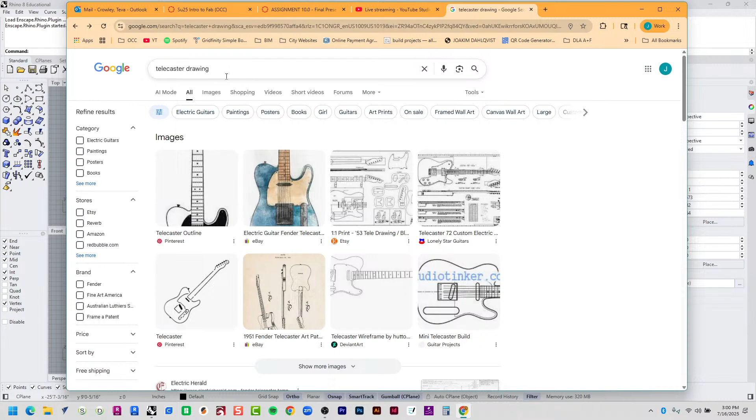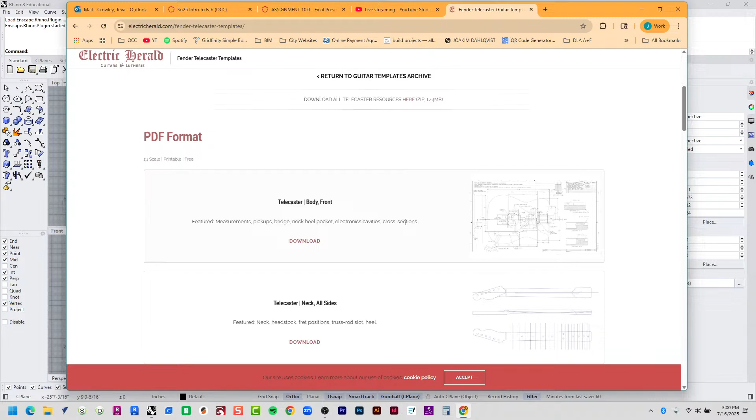If you just Google Telecaster drawing, Telecaster body, Telecaster blueprint, the website we're looking for is the Electric Herald. If you go to their website, you can find all of these Fender Telecaster templates as PDF formats, which is super helpful because we're going to steal all this information.

The fact that it's a PDF format means that likely this was drawn in some sort of CAD software and then PDF'd, which means I can open up that PDF in Rhino and steal all the vector information that I need without having to go through and use several different commands to redraw it. I could just take someone else's work.

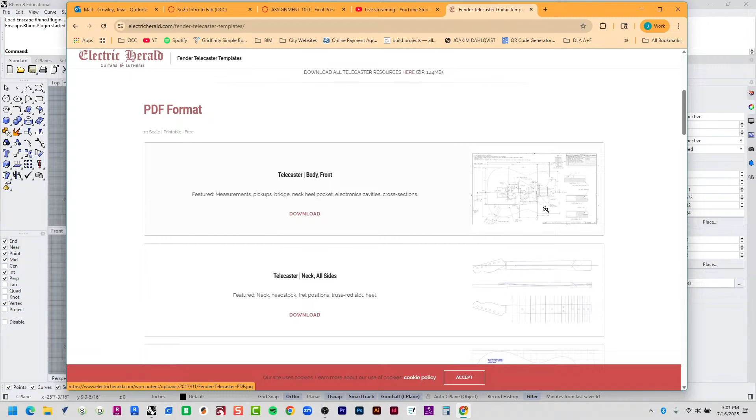So I'm going to be heavily borrowing this PDF here. Telecaster body front, I'm going to click on download. And here it is—all the specs, all the dimensions.

One thing to note about this project is that where all your pickups go and all your hardware, there's different depths. Each one of these has its own specific depth. And then also some of them have to be connected via some sort of channel, which you have to do in post.

So what I can do with the X-Carve CNC is I can get this whole entire outline shape plus all of these locations where all of these pockets go. We can cut it out of quarter-inch plywood, something really thin.

What you can do with that piece is take it over to your stock material, your final material for your Telecaster body, which has to be about 2 inches—1.75 inches is the thickness of your actual electric guitar body.

And I can't mill that on our little X-Carve here, because to be able to mill this out with one stock material that's 1.75 inches, I would need a bit that's at minimum 1.75 inches long. Also, most of it needs to be hosted by the router itself.

Then the router has its own issues with the Z depth, right? It can't go that high, so I would need about 4 inches of clearance in that CNC, and I don't really have that. So our workaround is going to be cutting quarter-inch plywood, very easy, very doable.

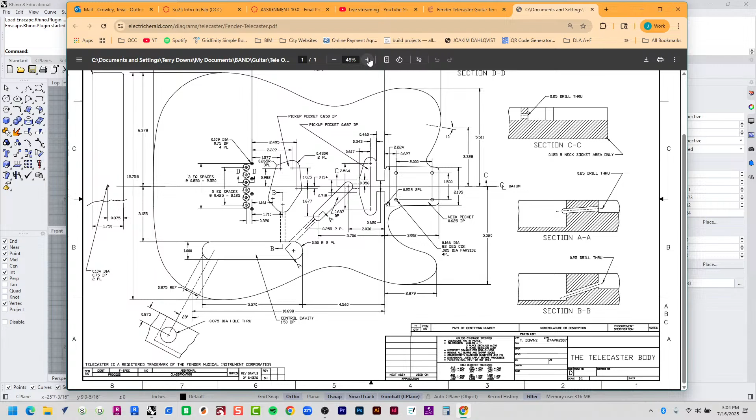And then these little tunnels in here from this pocket to these two pockets, these little dashed lines represent the hollowness inside of the guitar body itself. Let's keep the diameter for that.

Oh yeah, everything is in here. We have all the different radii—0.265 radius there, 0.430 radius there. This is section marker B, so it's like an architectural section, so I can look at section B. Lots of information on this drawing. Here's section BB, and there is a quarter-inch drill through.

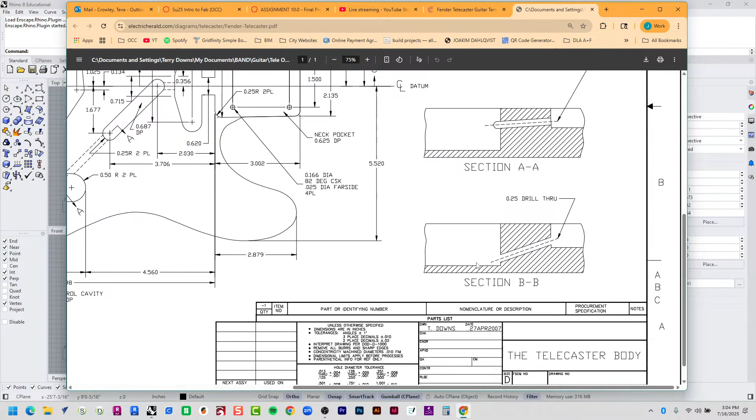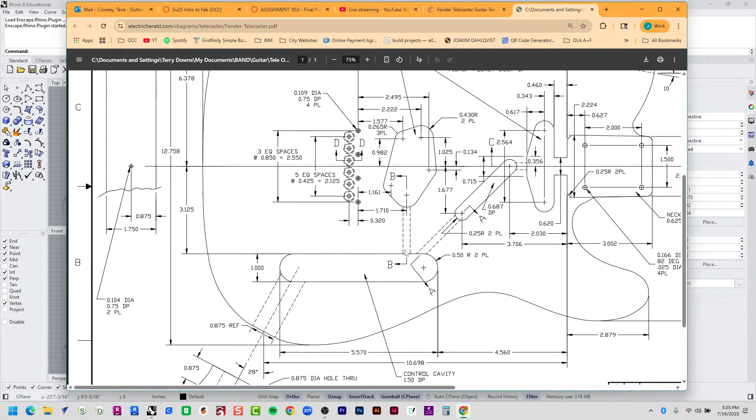You can see that it's angled, and that's because where BB occurs, I'm going to have to take a really long drill bit and tunnel my way through there. It's hard to get a big fat Makita drill in there to go straight in, so you're actually going at it at an angle, which is totally fine. It's just for passing a cable or something through there. I'm not a guitarist, so I don't really know what goes in here, but I know how to make this thing, so I'm going to be borrowing from this.

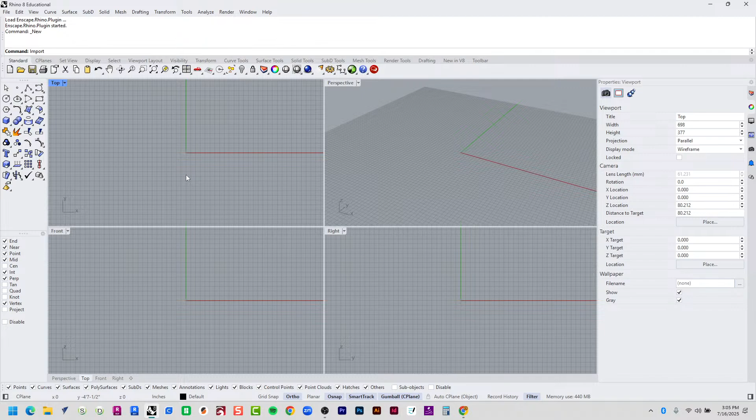This is sitting in my downloads. I'm going to start a new project in Rhino, go to small objects, inches, and import. You can go to File, Import, or just type Import. I'm going to my downloads - I don't see it here, let me make sure I've downloaded it. Let's put it in downloads for now. Back in Rhino, here it is.

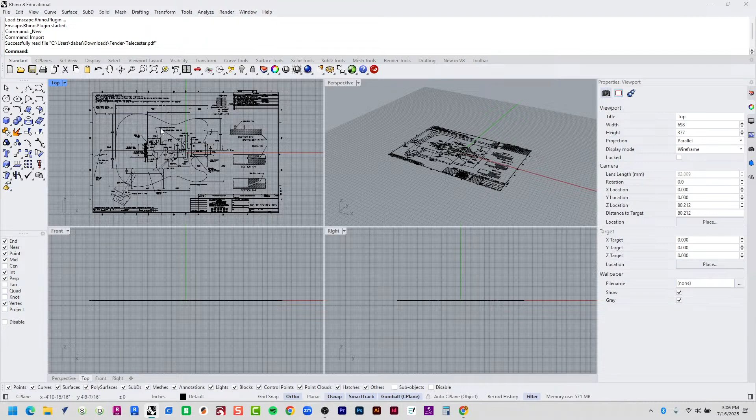I can scale it up or down, I'm just going to hit OK. Not really concerned with the scale because I'm going to have to scale it up and down myself anyway. So here it is, and if I go through and start clicking these things, I've got actual line work in here - these are actually little teeny tiny lines, which is great. I just need to trim this up, clean it up, so I can have one nice big long continuous line instead of a million lines.

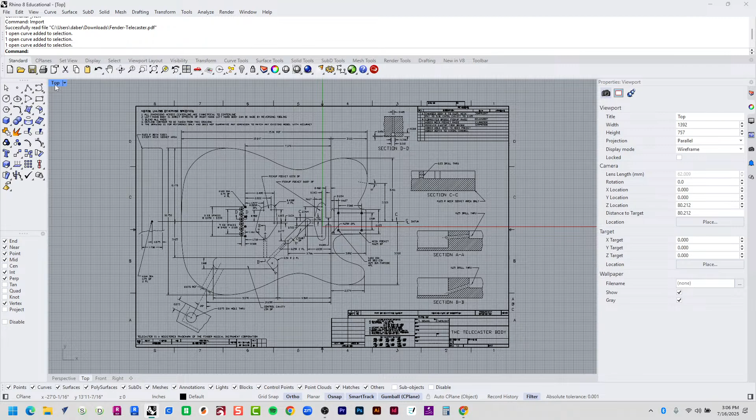So I've got a couple tricks for that. First, we want to take care of the scale, so select all of these curves by making one big large selection window. I'm going to organize this into some sort of layer. Let's put it on layer 1, change object layer. I'm going to rename this layer to PDF, whatever. I love using layers because it keeps everything super organized, but I can turn things on and off as needed, and lock things that are on a different layer.

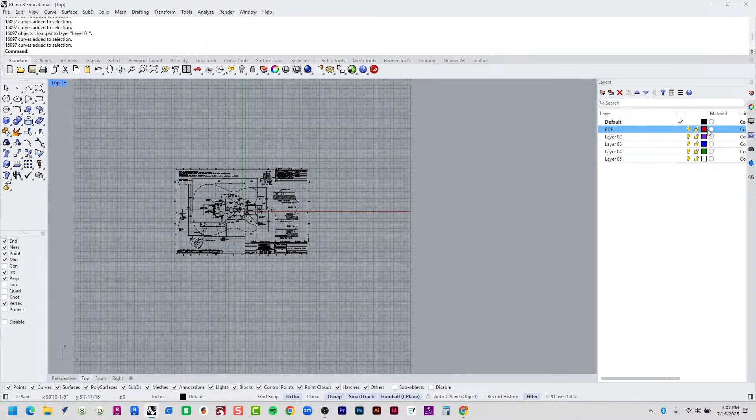I'm noticing that this did not turn dark red - that's the layer color it is on, it should all be dark red. So if I select it all, go to Properties, this little rainbow button right here, Display Color - this should be set to by layer. Usually it's not when you import things, so here it is, now it's all dark red.

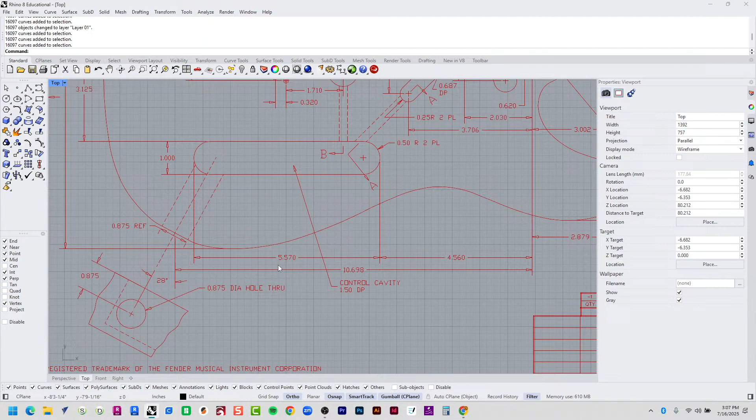I'm going to select it all and look for a measurement that's going to be easy to replicate, some round number. How about 1 inch? That sounds like a nice round number. So I'm going to select everything and zoom in on this portion that says 1 - from the tip of one arrow to the tip of the other arrow, or from one horizontal line to another, that should equal 1 inch.

Scale. All right, so I'm going to scale it from this base point. I'm going to click here once I've identified this endpoint. Now it's asking for a scale factor or first reference point. I'm going to come down here and snap to this perpendicular end and intersection point, click that, and then for my second reference point I'm just going to type in 1.

So you did both the top and the bottom, hit enter, and then typed in 1 when it asked for the second reference point? Yes, so basically what we're saying is from here to here, make it 1 inch. That's it. So let me undo and redo that.

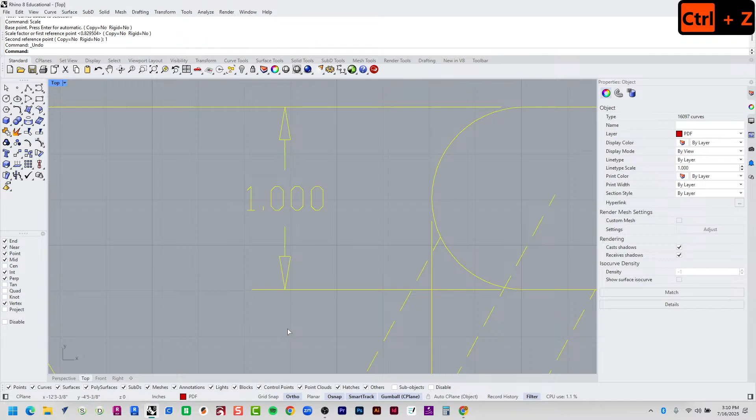Without even reading out the commands, I'm just going to say from here to here, 1, enter. Say from here to here, make that 1. Whatever it is, I don't care what it is. It might be 1, I can actually figure that out if I undo it again. Distance. Currently, based on the way I brought it in, this is 1 3/16 of an inch. It's actually kind of close, but not close enough, right? I need it to be exactly 1 inch. So from here to here, 1 3/16 of an inch.

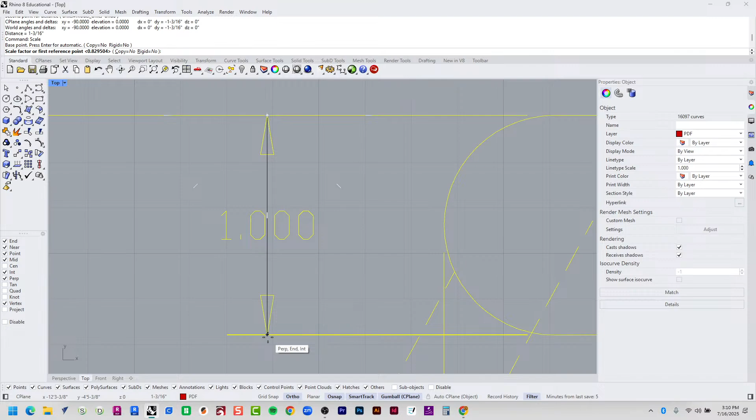So we're going to say scale, base point, here, click. Scale factor or first reference point. So scale factor, I could say, hey, scale it down 50%, 0.5. Scale it 2, which doubles it in size. Or I can say, here's a first reference point, make it go to this second reference point. So first reference point is going to be this point. I'm going to click it. Second reference point, I'm going to just type in 1, which is 1 unit, which is 1 inch, and then hit enter. So now this whole entire drawing should be scaled properly.

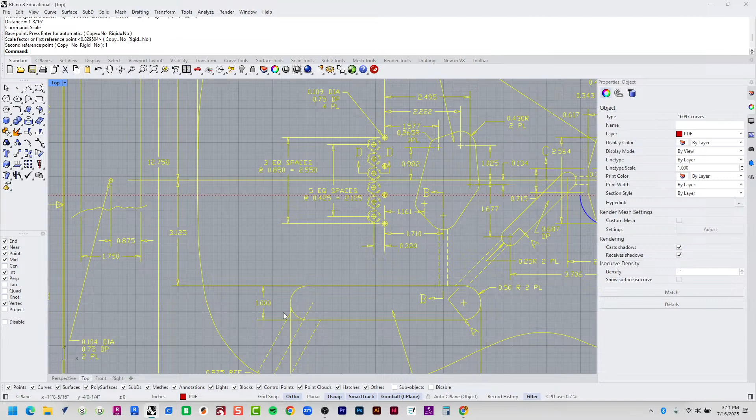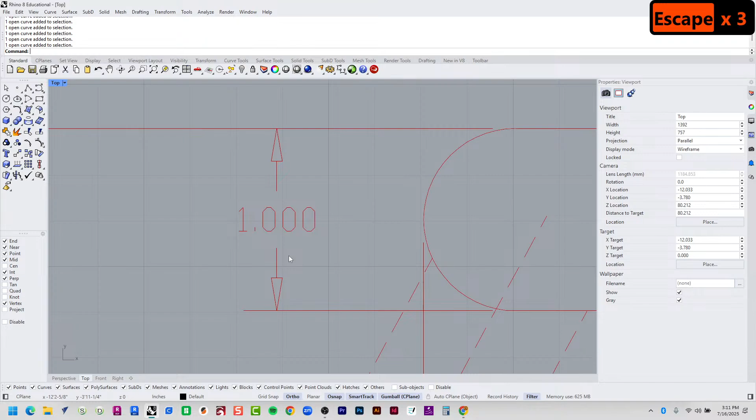All of these numbers here, don't be fooled. These are lines right now. They used to be dimensions in whatever software they drafted this up in, but now because it was a PDF and then I imported it into Rhino, these are not numbers. This is not text. These are not arrows. These are all curves. These are just lines. So just because it says 1.000 doesn't mean it is 1.000. Although now it should be. So if I test that theory out, let's pick another round number.

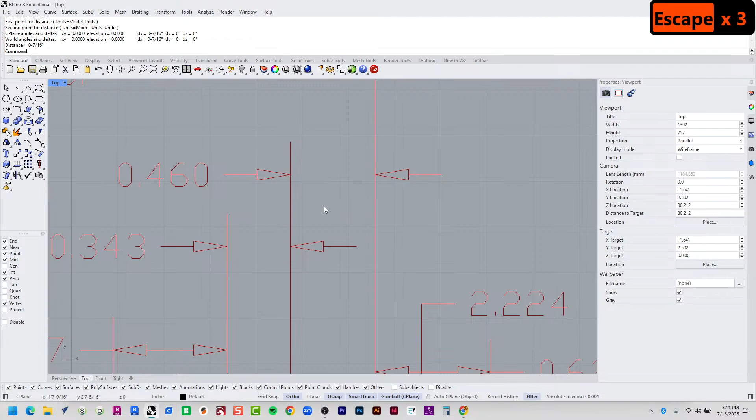The measurement between these two arrows should be 0.460. Let's type in distance and measure from this line to that. I'm getting 7/16. What does that equate to? Let's try distance. This time, instead of using model units as my measuring method, I'm going to click here where it says units, and I'm going to say measure things for me in the form of inches in decimals.

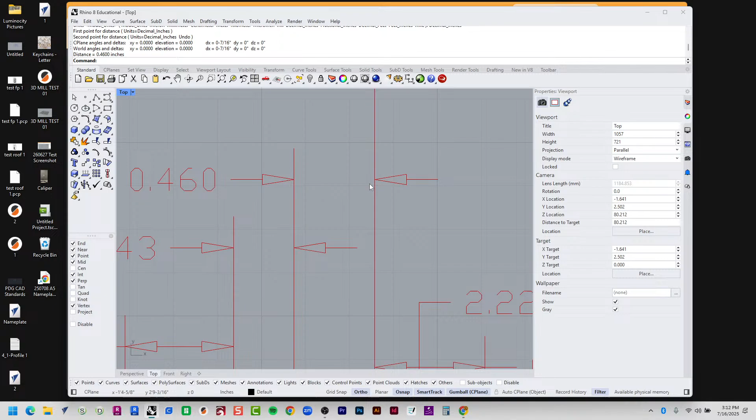Right? Although my primary unit is in inches, although I'm usually working with fractions, I can still measure using whatever I want. I can even measure in millimeters. What does this equate to in millimeters? So it'd be like grabbing a metric measuring tape and measuring things that are American. It's the same thing. So the distance in inches and decimal from here to here is 0.4600. So that means everything's scaled properly.

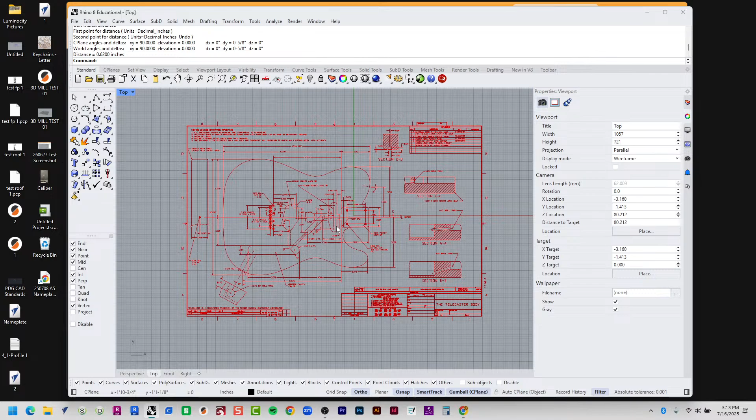Let's check it again, here to here, 0.3433. So just with those 3 measurements, I know I've done something correct. 0.620, here it is, 0.620. So what that means is this whole entire drawing is perfectly scaled, right? When I'm in Rhino, I'm typically modeling in a 1-to-1 form, right? 1 inch in my head is equal to 1 inch in real life is equal to 1 inch in Rhino. So 1-to-1. So now this is 1-to-1 scale.

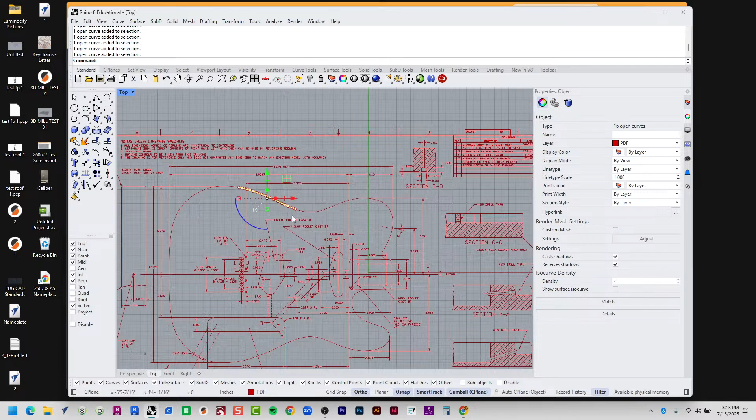What I need to do is I need this information right here, all of these curves right here. And I can go through and hold shift and I can select each one and then keep panning around and zooming in and out until I've selected everything, and then join them. But we could also go a little bit faster using selection windows. And this is where making cross selections like this come in handy. There are two different ways to make these selection windows, left to right or right to left. Those are two completely different things.

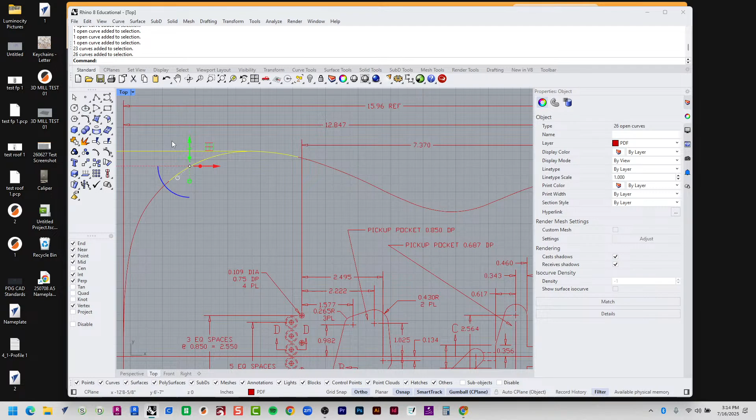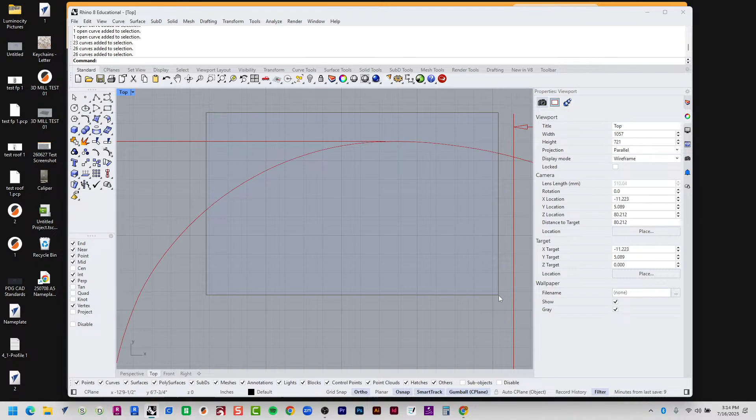So let's look at what it means if I do it here from left to right. It selects all of these lines. Now if I do that same shape right to left, it selects all of those lines plus some other line, right? So when I go right to left, it's actually able to select all the lines that are fully encompassed by this window plus whatever is touching it on the edges, which includes this horizontal line. If I do the same shape going left to right, it will only select things fully encompassed by that window, but not touching the edge, which I can use to my advantage, right? So I just swooped in 22 curves in that one selection.

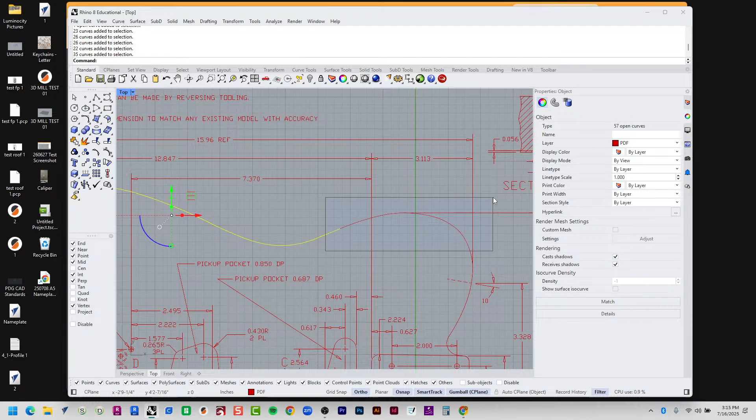I'm going to hold shift and make another window, left to right, trying to make sure that I don't fully encompass the wrong things. All right, there's a bunch more. Let's do it again, left to right. Make sure I'm not fully encompassing anything else that I don't want. That looks good. It can get tricky. Sometimes I'll go right to left if it's easier ergonomically for me.

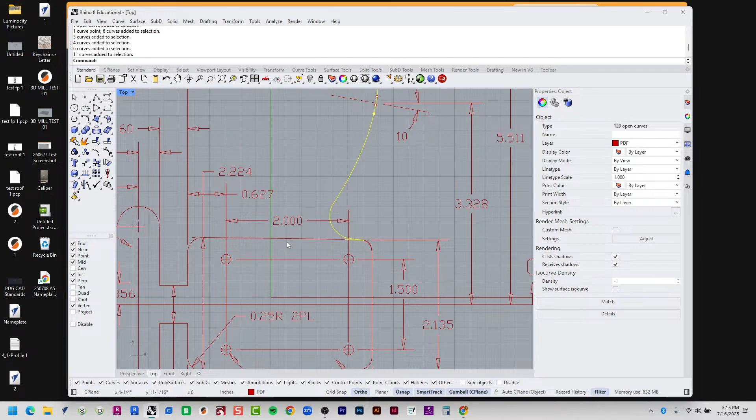And now I can go much faster, but I need to be very careful, right? This is actually the line of where one of my pickup pockets goes, so I don't want that line. How do I remove a curve from my selection? Hold Control and then select that curve. That's deselecting specific things. Letting go of that and holding Shift is adding things.

I can also deselect using a cross selection window. Same concept, left to right, right to left. So let's grab all that again. Let's grab this stuff again. Being very nitpicky about what I pick up. I think I'm trying to go this way.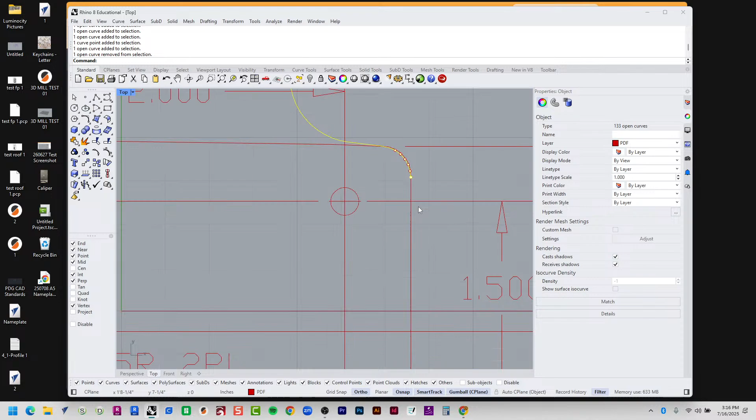So I can select the one that I want using the selection menu. It's saying, hey, do you want this one or that one? I'd have to kind of zoom out to figure out which one I do want or not. Sometimes they're the same exact shape, so it almost doesn't matter. So if I hold Shift and click here, and I can cycle through it by just hovering my cursor over it, I see pretty much no difference, so I'm just going to choose whichever one.

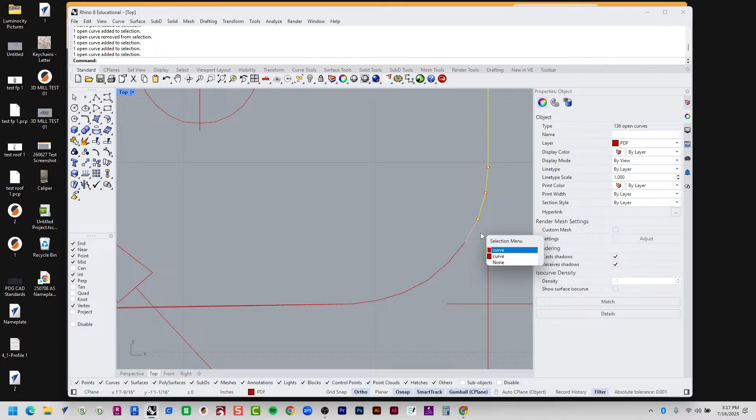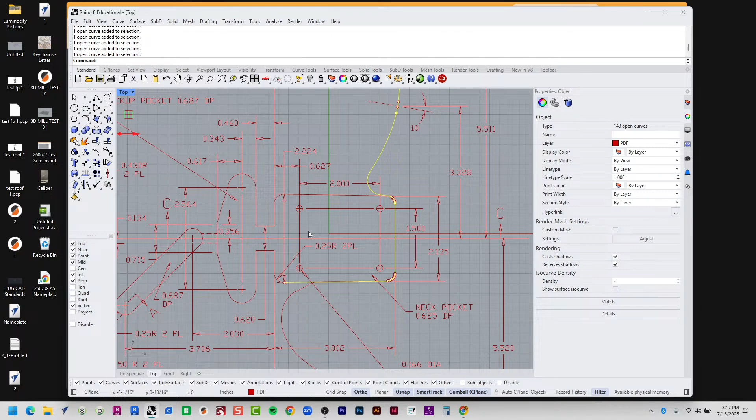Okay, again, there's some shared geometry here, and that's because it's the pickup pocket plus it's the overall guitar shape. So what I've done in the past is actually make two templates on the CNC, so that way I can first do the outline of the guitar and then do the pockets separately, because this neck pocket is all the way justified to the edge of the guitar body, so I can't just cut this shape out the other way.

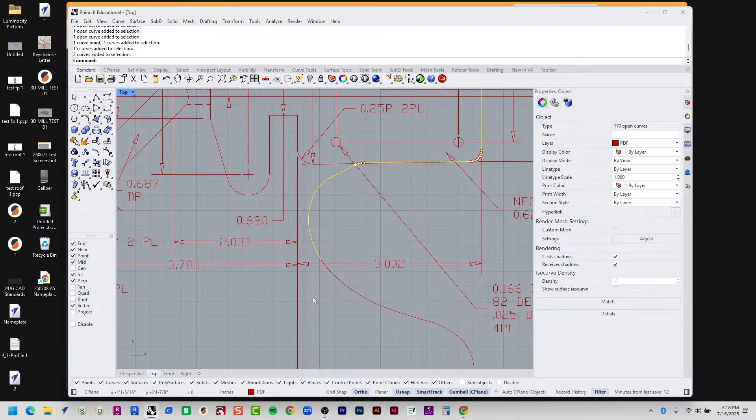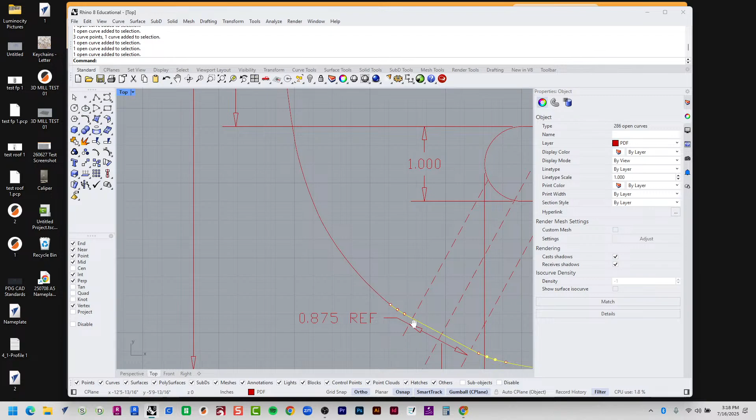So this line is not correct. I'm going to deselect that and select that one instead. Zoom in and out as needed, pan as needed. Make big selection windows when possible. And just like that, I'm done.

Where? Oh, wow, great eyes. Good memory. All right.

You want to be super careful. You just spent 30 seconds selecting all these. Don't click anywhere else because it'll deselect everything. If you want to be extra careful, change object layer. Put all these curves you just selected on another layer just to be safe. And change object layer just like that. Then I can click away and whew, all right, at least they're all organized into one layer. If I have to select them again, I can just right click on layer 2, select objects, and boom, I've got them all again.

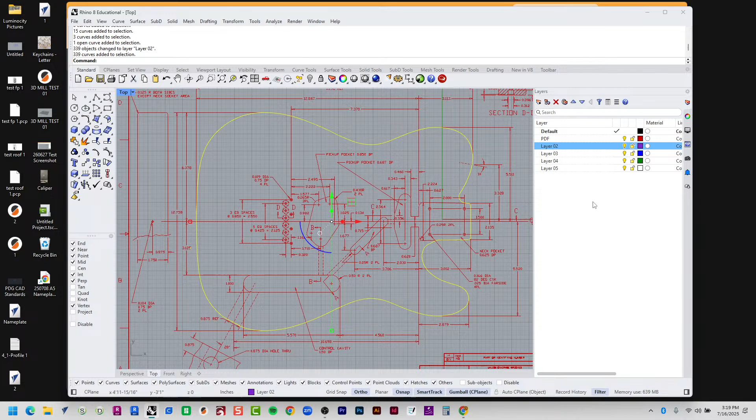Okay, or I can turn off my PDF layer. Now I just have the purple ones, right? That's nice. That's exactly why I like to utilize my layers. Let's also put in all of these pockets, and then we'll start to clean these things up to make sure that everything's correct. So I'm going to call layer 2 outline. Let's call layer 3 pockets. And then we'll have a final one at the end where we finish this off.

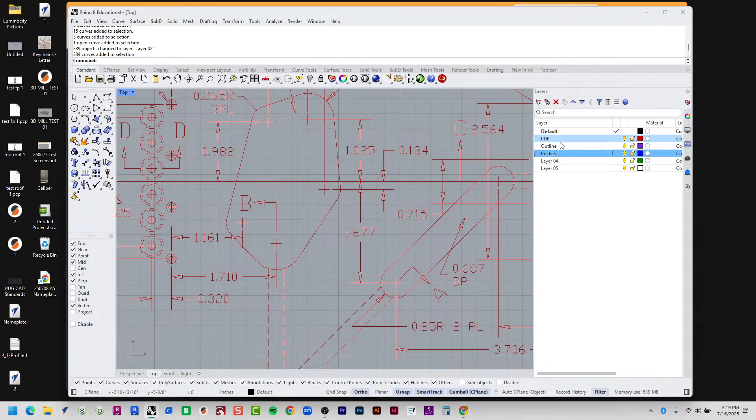So let's go ahead and make selections. Be careful not to select the wrong things. It gets very hard with this tighter stuff. You get lucky sometimes if they're big long lines, but you don't always get big long lines. It's a little bit tedious, but this could have taken a lot longer.

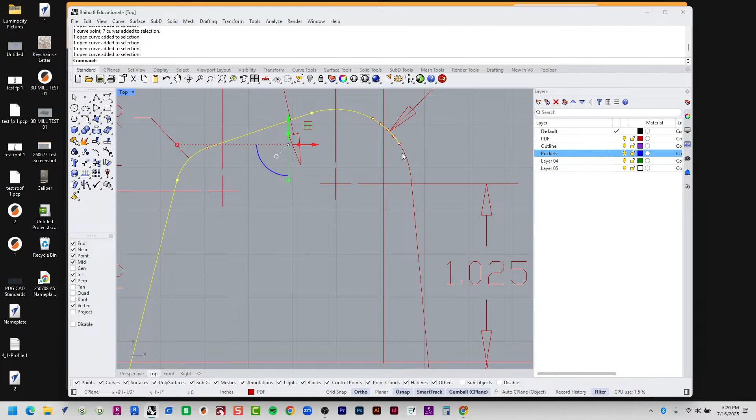So if you have two stacked like that, and you just arbitrarily pick one, will it put it on the top? You know what I mean? Will it connect to the line? Because if you have one lower and you click that one, will it attach it to the one on top?

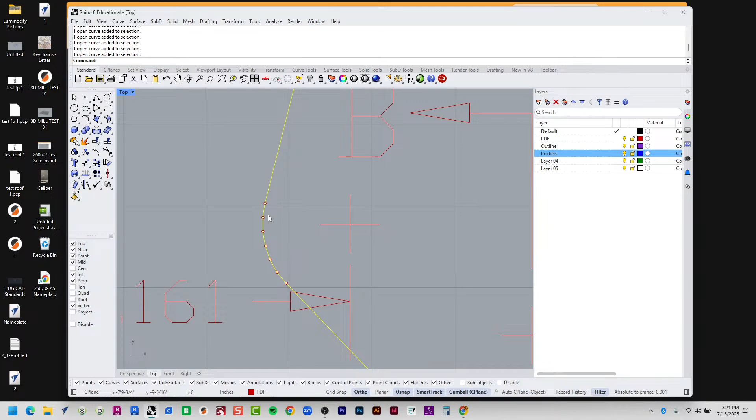It can. It just kind of depends whether or not they occupy the same exact X, Y and Z space. If it's actually way lower in the Z, but we can't perceive that because we're in top view looking straight down, then no, right? Because then we can't say, hey, join this to everything else up here. They're not touching at all. But if they occupy the same space, they might be able to join, yeah.

All right, so that's good. I'm gonna go ahead and change object layer, put it under pockets because I don't want to lose that information. And now I'm going to tediously do it here.

I was going to say this is tedious, but the output is awesome because you get your own guitar out of this thing. So I think it's worth it. So let's do that. Let's do that, that. All right, that's going under pockets. All right, just a couple more.

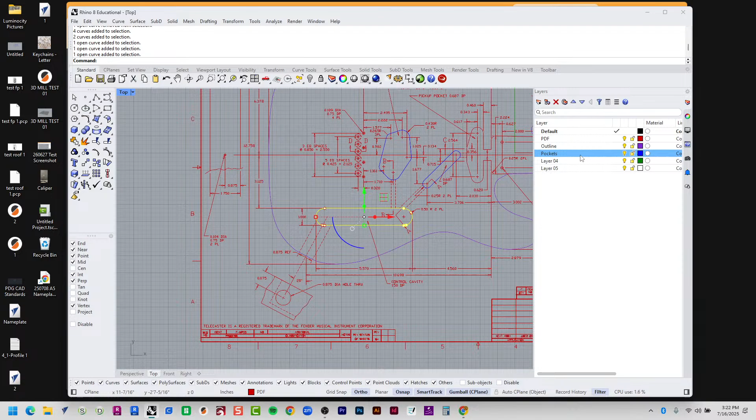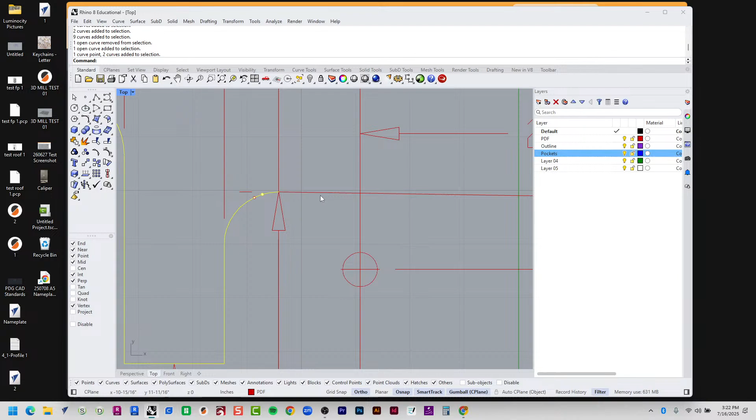All right, now my final one. If you grab too much, you'll be okay. I've got a little method where it's not going to matter to us. We're going to use a fancy little command called curve boolean. All right, that's all there. Let's do this one here.

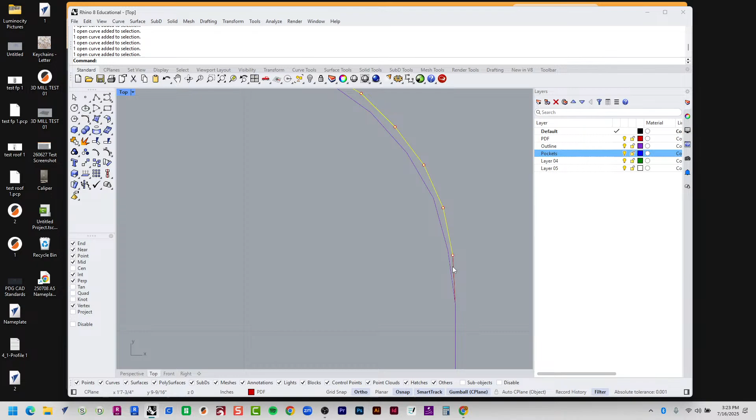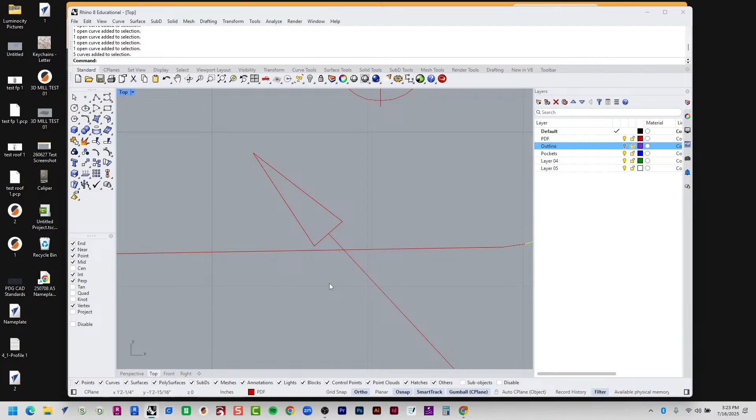All right, here's where the second one's going to come into play. So I don't want to select the purple one. I want to select the red one. Purple one's occupied. It's doing something else for me. Red, red. I can also just turn off the purple layer right now and only see the red stuff that's here. All these little shortcuts to go faster and faster.

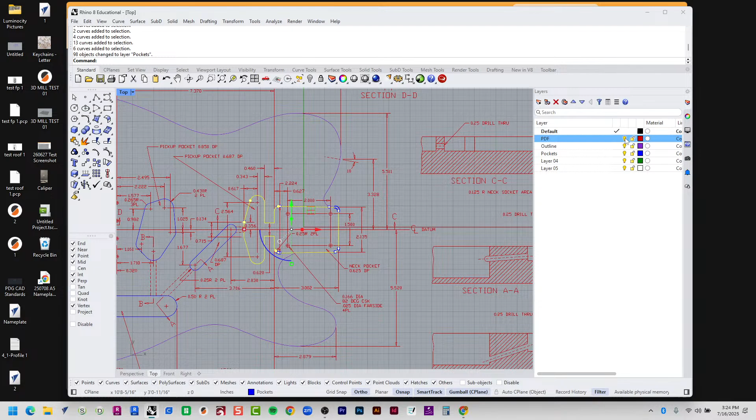Almost there. All right. Pockets. Turn off my purple. Turn on the purple, turn off the red. I think I got them all. Let's see. Let's double check it. So these holes, I believe you drill them out yourself with either a drill press or a drill. So I don't think we have to worry about those. These are 2 channels you can create with a drill. I think that's basically it.

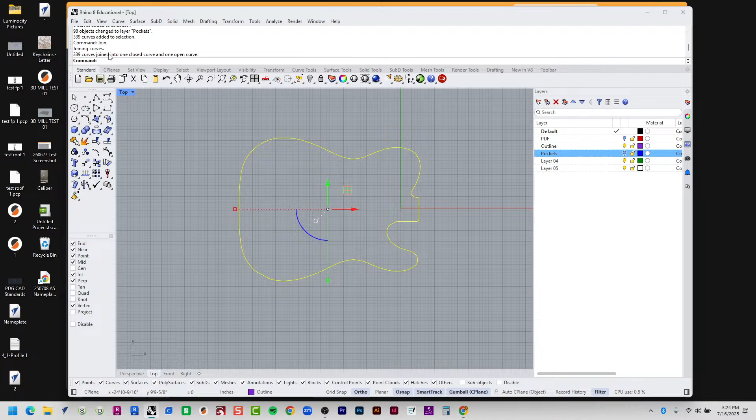So I'm going to go ahead and turn off this PDF layer. So what do I have now? I just have very specific curves. I still have like a million curves. If I turn off this blue one and I join all of this, let's see what happens. Instead of 339 curves, let's join them. It says 339 curves joined into 1 closed curve and 1 open curve. That's actually pretty good. So if I select it again, this is 1 closed curve. But it says I still have 1 open curve somewhere.

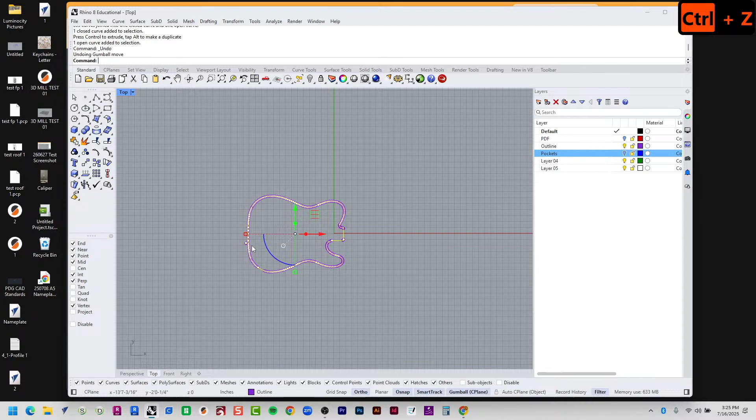So if I just scooch this out of the way, there's some open curve somewhere. Here it is. Right there. So if I hit undo, Control Z to undo, that little guy is right here. So I must have accidentally picked up something that I didn't need from the number 5. So change object layer back to 5. Select all this. I have 1 closed curve, and that's going to be great for the CNC. We want the router to go in, do 1 closed shape.

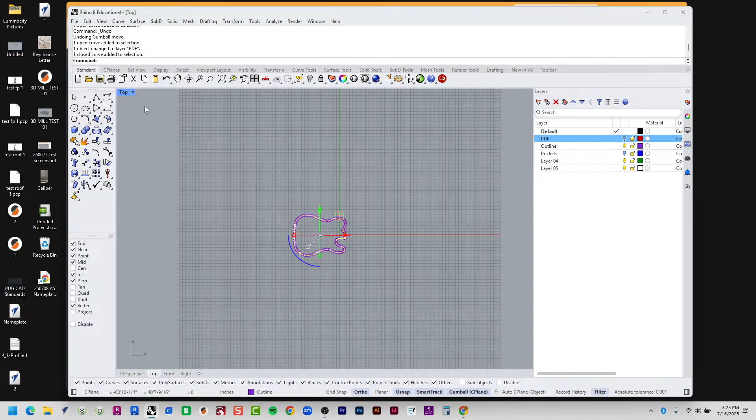It's going to take a couple of passes to go through 1/4 of an inch, maybe 3 passes, versus it having tons of teeny tiny curves to optimize and try to figure out which way do I want to go, how do I want to go about it. And we want to join that as much as possible, because one potential thing it could do is say, hey, I'm going to cut here, then travel way over here, cut there, travel back this way and cut over here. The laser cutter will do the same thing. So if we don't join this, we might get that situation.

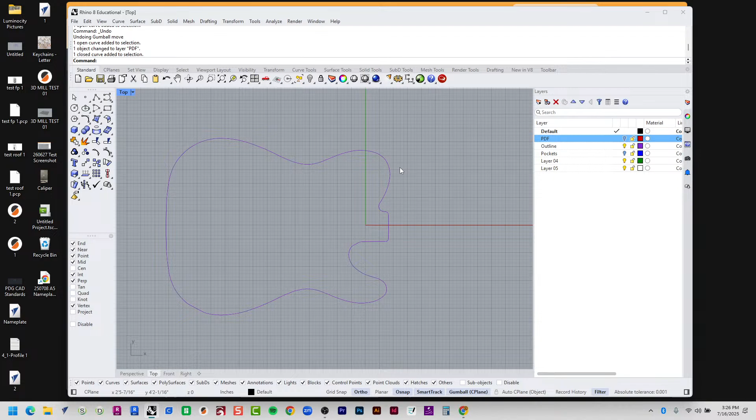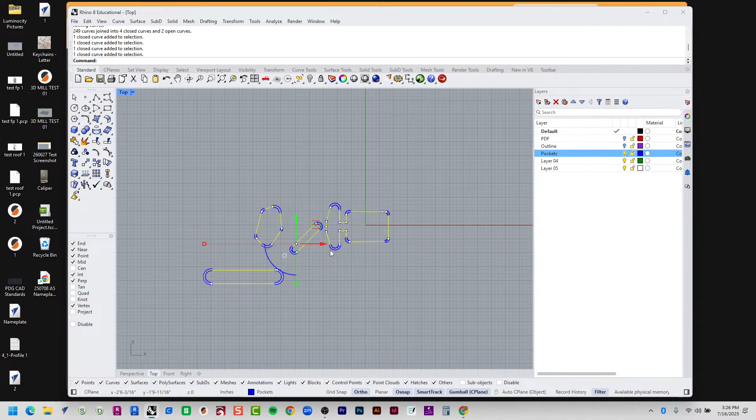So I'm going to turn the purple one off, turn the blue one on, and I'm going to select them all and join them, hoping for 1, 2, 3, 4 closed curves. Let's see. 249 curves joined into 4 closed curves and 2 open curves. So again, I have a couple of open curves. So if I take this one and this one and this one and this one, those are my 4 closed curves. I can hide them using the hide command.

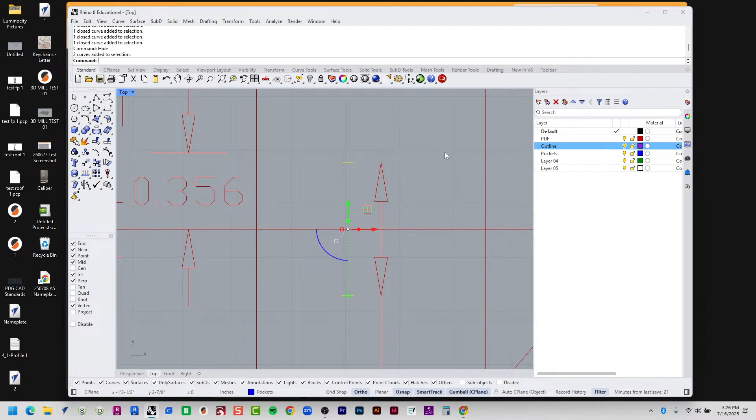And then I'm going to make a huge selection window because my eyes can't visually see where these open curves are. And there they are. 2 teeny tiny curves. If I turn off my PDF layer, that doesn't really clear that up. I don't know where they come from. Let's type in show. The opposite of hide is show. And they seem to come from this shape.

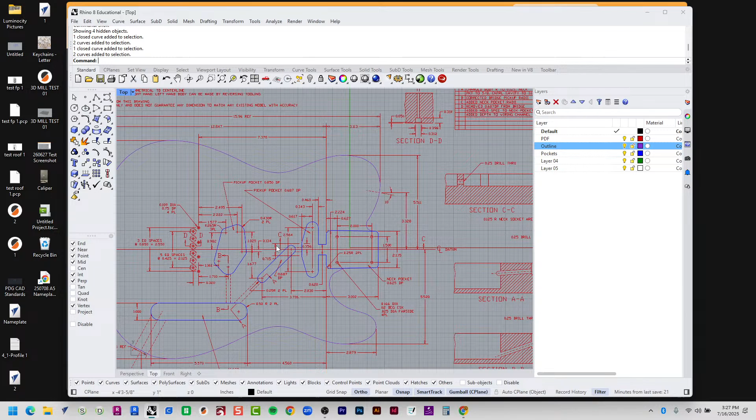So if I select that shape, or if I select the window going left to right this way, here's those 2 lines. So they're just 2 additional arbitrary tiny lines that there's duplicates of in this drawing that really don't matter to me. So I'm going to go ahead and zoom in and select them and delete them. Then you have 4 openings there. Can you set one opening to go deeper than the other one? Because right now they're all on the same layer.

To have them carve deep at different depths? Because they're all on the same layer. Yes, if we were seeing the actual stock body, which we're not. Yeah. But essentially, if we had a bigger CNC, we could totally do this with the 1.75 inch material. Actually, we could do 2-inch material and then plane it down with the CNC to get it down to 1.75, and then do all of these pockets in very specific depths, and then do the final cutout.

Totally. But we're not doing that process. We're doing 1/4-inch Baltic, 1/4-inch birch plywood, and just cutting holes through each of these things, because we're going to lay this on top of our stock material and use a hand router with a bearing bit to trim off the excess wood, and then a plunge router to get all of these pockets.

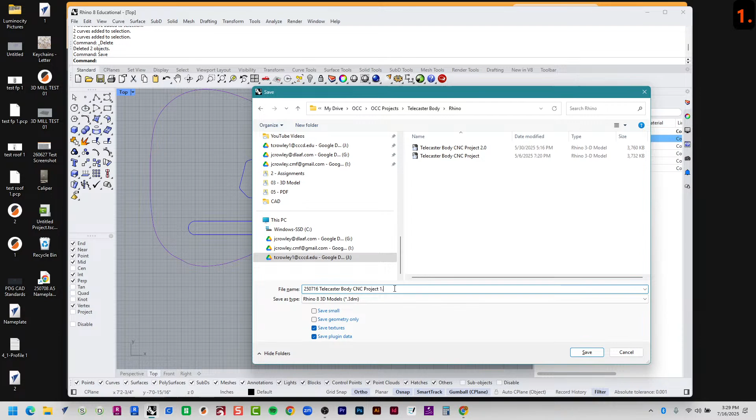So there we go. That's the Telecaster body. It's all done. So now I can save it. I'm going to save it here under, I probably have already done this, but yeah, here it is, Telecaster body. Here it is in Rhino. I'll open up that file, but let's call it 250716. Let's call it 1.5. I don't know if 2.0 is any better.

Then you want to also select it all, export as a DXF, right? Because we need a DXF to get into Easel. So OCC projects, Telecaster body, DXF, AutoCAD drawing exchange, 250716 Telecaster body jig.

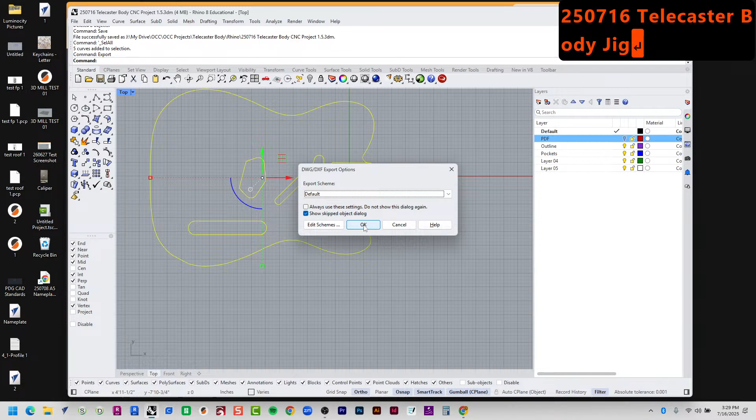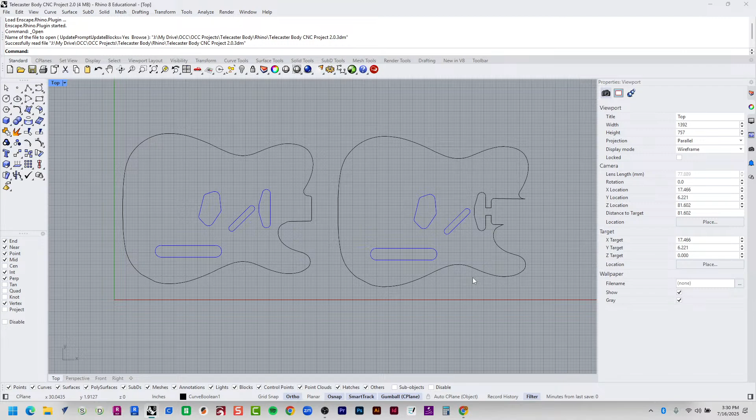And then I'm going to go ahead and open up the other one that I've already done in the past. So I'm going to open another instance of Rhino 8. I'm going to go to open real quick, and let's go to Rhino. Let's see what my 2.0 was back in May. So here are the two pieces that I milled out for my student, or with my student.

First, this shape with all the pockets in it, minus this last pocket, because if I included that pocket, this is the overall shape, right? And I want to do this in series, so I want to cut both of these out with the X-Carve. That's easy peasy. But then I want my guitar body designer to take the first one, lay it on their wood, pocket all these out first, and then mill out this shape last, right? With this information here in this area.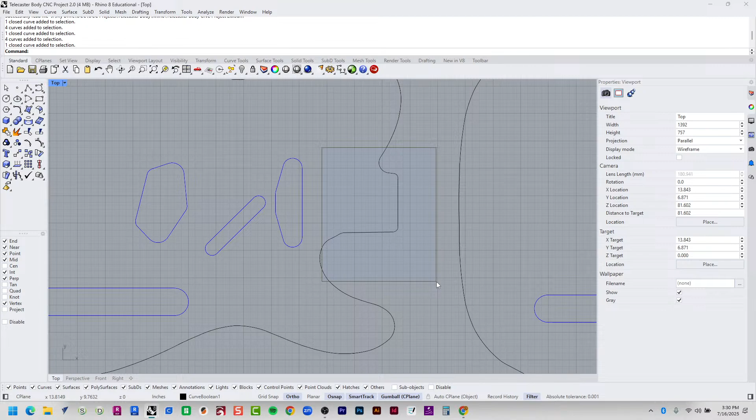And then take that jig or template off, and then grab template number 2. And they can align template number 2 to their stock material using the edges, using all of these pockets. And then now this new shape allows you to get that last pocket, which is all the way justified to the right edge of the guitar. And so that's basically how you do it. Then you drop it in Easel, select your different tool paths, and that's it.

Any questions? Did that make sense? Yeah? So my two guitarists, you guys are gonna make these? Wait, where's this other guitarist? In the hat right there. So maybe perhaps you need to buddy up. Yeah, and Francisco, if you three want to do this as part of your final project, this only entails one tool, but if you actually finish the whole entire guitar, that's a great final project. That'd be worth full points.

My student did this in the same exact process I just spoke about, but also took it to the laser cutter, I think, and just engraved their own name into it. Heck, you could put your own text object in here that says Crowley or made in architecture A170, made in the makerspace, property of the makerspace, OCC pride. You can add that on in here, right? So that's what he did for his final project. He did the whole guitar body and laser cut the body with our Omtech. Did you do the neck as well? He